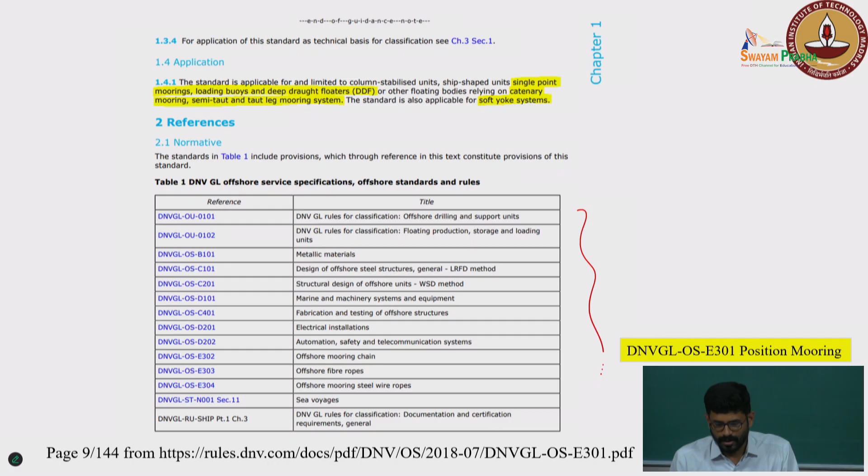This is about mooring design, but it doesn't end there. When you start a design, you have to analyze it, and you have to again make changes, so it's an iterative process. Different mooring analysis methods exist: quasi-static, frequency domain, time domain. This is what industry practices.

Again, in this time domain, we have the decoupled analysis and coupled analysis. But before we get into time domain, it is important to understand quasi-static analysis, because that is the very first step when you have a floating structure and you put your moorings in place.

Quasi-static, the word itself clearly says it is not disturbed much. Your floating structure moves very slowly such that the line dynamics are not affected. Basically this point moves along with your floating body, correct? If your floating structure is going to move, that point is also going to move along with it, so it will create some kind of whipping action.

In reality, it will create some kind of whipping action, but if your floating structure is not responding quickly to the environment and moves slowly, then a quasi-static analysis can be done. That will be the very first step, and then you can go on to do the time domain analysis.

So the industry practice is time domain analysis with the decoupled approach. The coupled analysis we generally don't do, because it has a very high computation cost. To solve a problem, it can take almost a week to complete.

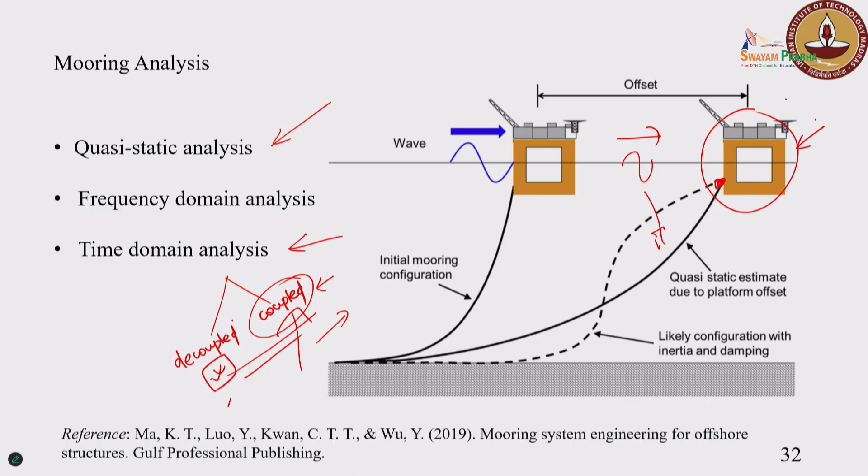So now for the basic data input, you need to know the type of floater you are going to deal with - in this case the WEC characteristics, type, and dimensions. The floater motions will give the loading to the fairlead of your mooring line - that is what travels to the line. So you need WEC characteristics and environmental loads: wind, wave, current, water depth, soil characteristics, and operational requirements.

Sometimes, as said, for your drilling operations you want to have very little excursion. You go exactly to the site where your floater is, and to that particular location. For example, if this is the site where you want to drill, you take your semi-submersible exactly to the top of that place where you want to create the well. Then you have a restriction on how much this floater can move around.

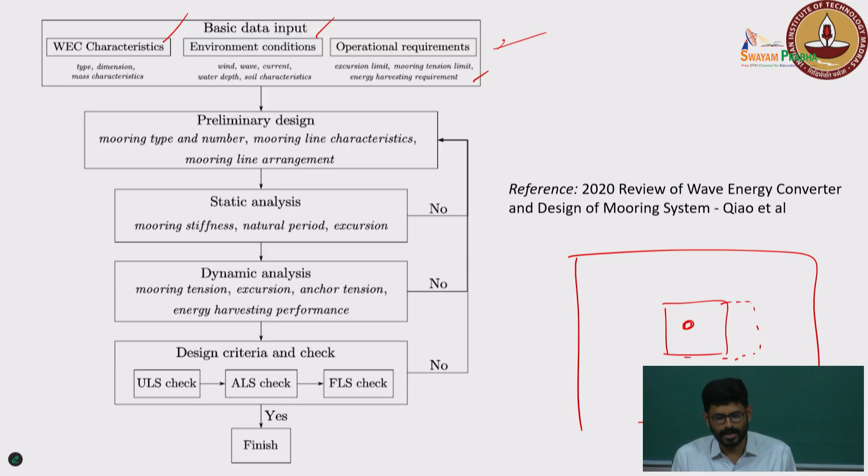So we have some constraints that have to be taken into consideration. This includes the excursion limit, and then the preliminary design, basically selecting the mooring type and number, and also the mooring line characteristics and the mooring line arrangement.

So how it has to be connected to your floating vessel and where it has to end. We start with the static analysis, then we go on to the dynamic analysis, then you do the design criteria. This is not a complete process, it is going to be an iterative activity. If it satisfies, go to the next step, or else you go on to change it. So that's what we mean.

The static analysis basically is to have a good understanding about what is the fairlead tension you get without any loads and other things. You just have a floating structure, you connect your lines to the structure, and see what is happening around.

Dynamic analysis, so basically when we say it, you are subjecting your floater to respond to the waves, and then because of the response of the floater, how that is being transferred to your mooring line.

Then we move on to check the design, because all items have a limitation. What is the breaking load limit? When you purchase some item from a shop, you actually know don't apply more than this load, it will fail. The same thing for your mooring lines as well, you will have some limit.

So by doing all this analysis, we are trying to check whether it is within the limit or not, whether my item will be sustaining, whether it will be safe for the 20 to 25 years service life. That is why we do this ultimate limit state, accidental limit state, fatigue limit state. Once it satisfies all these, it is finished.

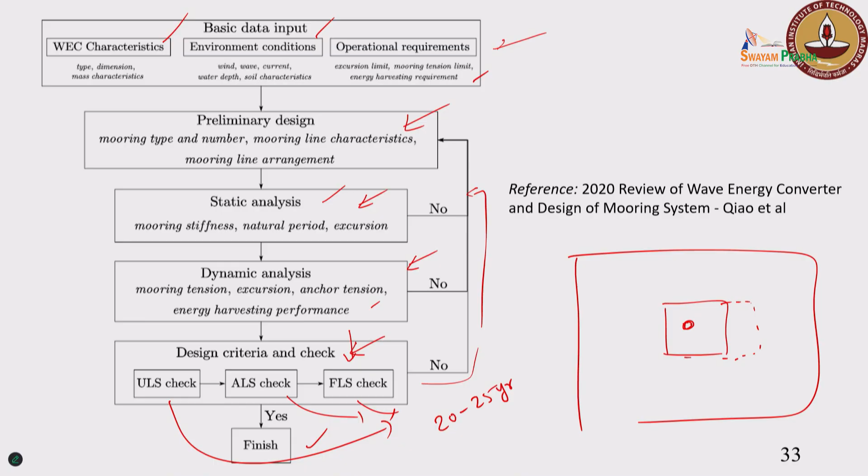Did they consider the temperature gradient from the water surface? No, they don't worry about that. They are all rugged structures. All this chain, wire rope, the temperature gradient will not have any impact on the overall performance of your mooring.

Generally, how much does it cost? I am not aware of the exact cost, but it's all huge in numbers, especially for offshore mooring lines, because it has to take care of the corrosive environment. So it is not just your normal steel, it is basically galvanized steel. So all these things add up, it's an add-on to your existing items, so it will be very costly. Yes, proceed, I could give you some numbers.

Some literature said that mooring can cost up to 40% of wave energy converters. In 2019, I visited Hawaii, there's a wave energy test site, where some mooring failed. They are in the process to repair and rebuild the mooring. The water depth there is not that deep, from 30 to 80 meters, I don't know which one failed. It took them $2 million US dollars to fix.

So give you a sense of how much it costs. Also, like if it is an FPSO, is the amount you are putting worth it, because the FPSO itself will be a huge number and the mooring lines will be less in comparison. So it depends, whether like for a point absorber, which is small, the mooring itself will cost more relatively.

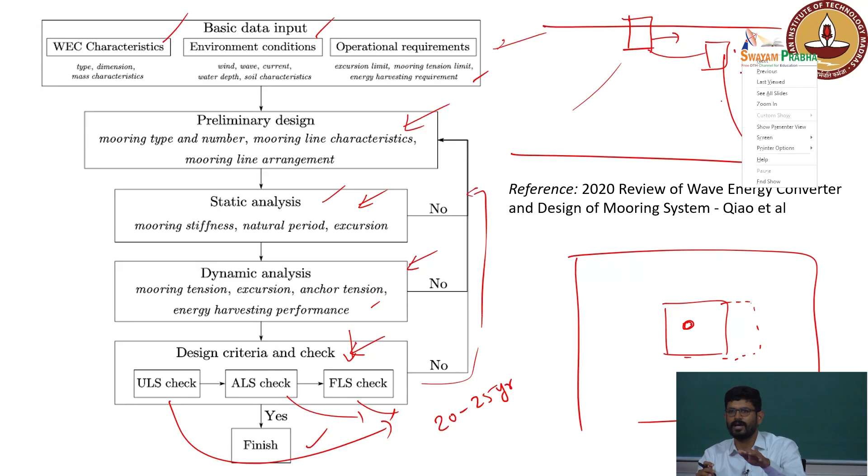What about that direction, sir? Direction-wise, that's a very generic question. For example, for a given site, the first thing you will get is a rose diagram. You might have seen a rose diagram - it shows in which direction, what is the most probable wave height, and what is the occurrence of that, all those things you will get from it.

Based on that, things will be aligned, so there is no direct straight answer - all these things are site-dependent activities. You need extra data, meteorological data, which also includes these items. Based on that, they orient the mooring in such a way that it takes these considerations into account.

What is the general span of mooring, how much lifetime? Whenever you have this, that is why we have the fatigue limit state. When we say fatigue, you carry out the fatigue analysis. Basically the fatigue limit state means you are going to do a fatigue analysis. One is you stretch it to the extent of what load it will take to failure - that is extreme analysis.

The other is fatigue analysis - you apply cyclic loading for 20 years, and sometimes this can be very cyclic in nature. For fatigue life of the subsea flexibles or similar components, the factor of safety has to be 10. Which means if your service life is 20 to 25 years, your fatigue life should turn out to be a minimum of 250 years. When you carry out the analysis, if your fatigue life is more than 250 years, that is a pass. If it is less than that, you need to go back and change it.

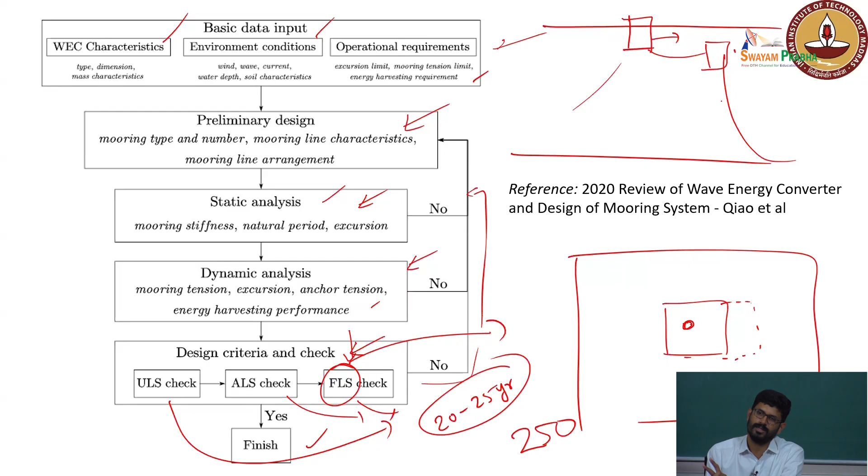Is there any specific diameter or something depending on the floater size, or how do you decide?

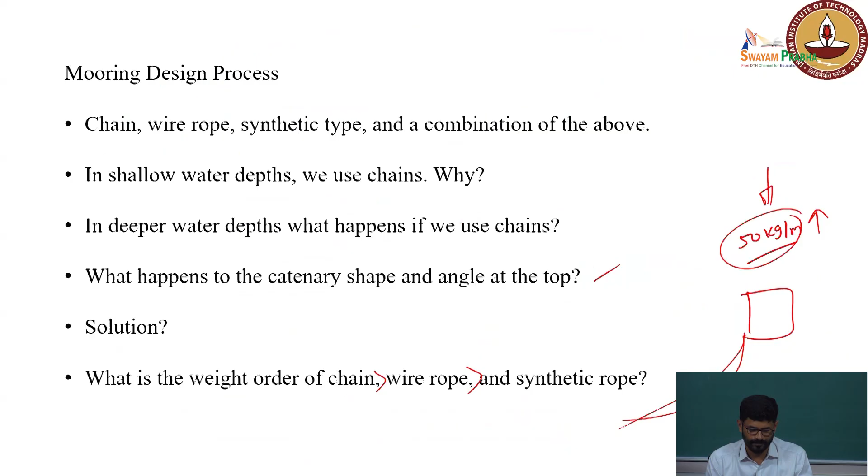It depends on the excursion only. Your watch circle basically says what excursion can happen. For example, in drilling, you don't want it to go beyond a particular distance because that will impact the drilling riser. So there's no straight answer, it depends on depth and floater size. The anchor circle varies: in shallow waters, the anchor radius to depth ratio is a higher number, whereas in deeper water it is equivalent to 1.

So this is for your anchor circle. For the watch circle, you can tune it. For example, if you increase the pretension value, the excursion also gets limited, correct? So all these items are a trade-off between each other.

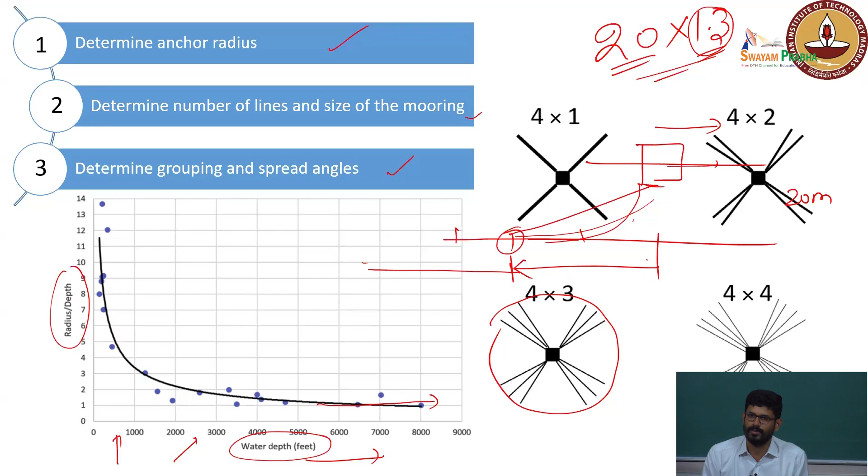If your pretension increases, the line length on the seabed will come down, correct? Which means at end B, the anchor point, there will be some loading now. If you have very few meters on the seabed, say 300 or 400 meters, that load will not be transferred to the anchor.

It is always safe, because when your floater moves, that much chain has to be lifted up, right? That chain will act downward, giving the restoring force for your floater. When your floater excurses, it has to lift the mooring line, so it's in suspension. The self-weight acts down and brings the floater back to its initial point.

Okay, so now we'll use the board to make it a little interactive, and we'll do the derivation.

If some inputs are given to you, how do you trace the catenary shape? What will be your top tension? As a thumb rule, we can say the water depth multiplied by some catenary factor, multiplied by its weight per meter, gives the top tension. Is that right? If this is your height, what did we say?

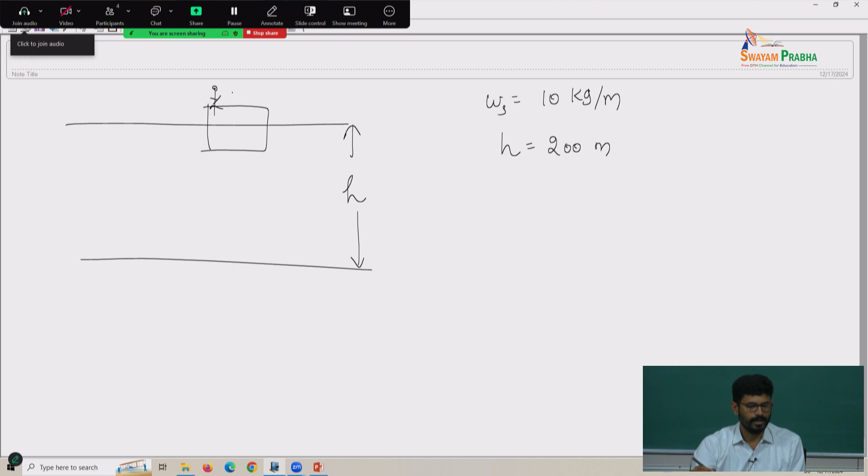Now let's take this water depth. You know at what site you are going to install it. Generally, when you go for a mooring installation, you know where you're going to install it and how much line you're going to release from your end. A person is standing here, and he is going to release the mooring line.

He knows how much line he's leaving. So now let's take the total length as 300 meters, and the water depth as 200 meters, sir. It has to be more than that, right?

So now you dropped your anchor somewhere here, then you have this connection all the way to the surface. The connection is on the sea surface itself. You know where exactly you dropped your anchor also—as the installer, you know you put the anchor here and moved this much distance. So this distance is also known; let's take this as x.

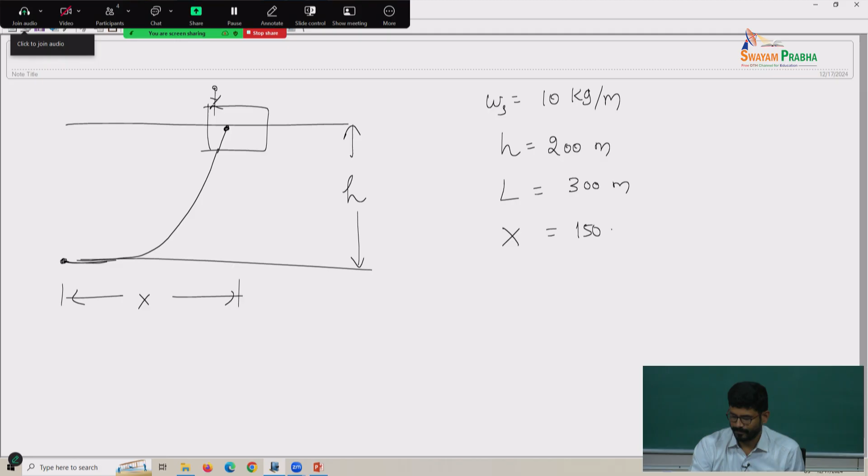Let's take x as around 150 meters or 100 meters. So let's increase it to 350 for safety.

So now you know you have certain inputs. The question is how to get the proper or exact top tension, if somebody wants to know what is the tension along the line, how to get it. On a simple thumb rule you can get it. Basically, 200 multiplied with some catenary factor into 10, kg per meter, and this is in meters. So you will get what is the tension at that particular point.

But if I want to trace this shape now, at some x comma y, let us take x1 y1, this is xn comma yn. If I want to trace this shape, how to get it?

You get the point. Some inputs are given to you, whether you will be able to trace the shape, that's a question. Now we need to have some equations, then only we will be able to get it. So now you have a physical problem with some inputs. Now I want to convert it to a mathematical sense, but I actually don't know how to get it. As of now, I don't know.

So now to get it, let us try to take a very small element and try to do the force balance. That's what you did in fluid mechanics all the time. Whenever you want something, you take a very small element and try to do all the force balances, try to come up with some expression.

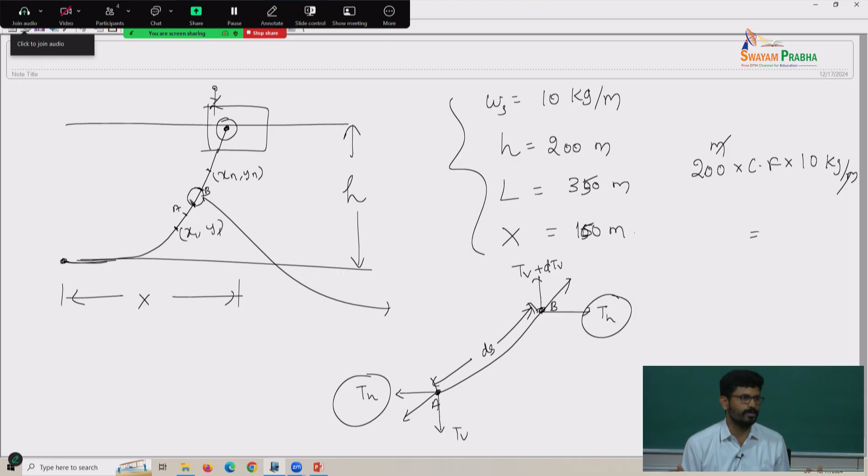When we say d, it is basically an incremental tension, incremental value. The d is basically a small element - for that small element, what is the incremental happening. So here the TH will be same as the TH. Why? The TH whatever you have here is equivalent to the TH here. Why? If there is a difference in the horizontal forces, horizontal tension, it will move away. So you are sitting in place, whatever the environmental load acting on the right side is equivalent to the left side, that is why you are staying in place.

The same way here also, so this TH will be same as this TH, whereas for TV it will be TV plus dTV, because if you are just lifting a line, for example you start lifting it, so here whatever you see at the bottom, at the top, it will be different. The same procedure.

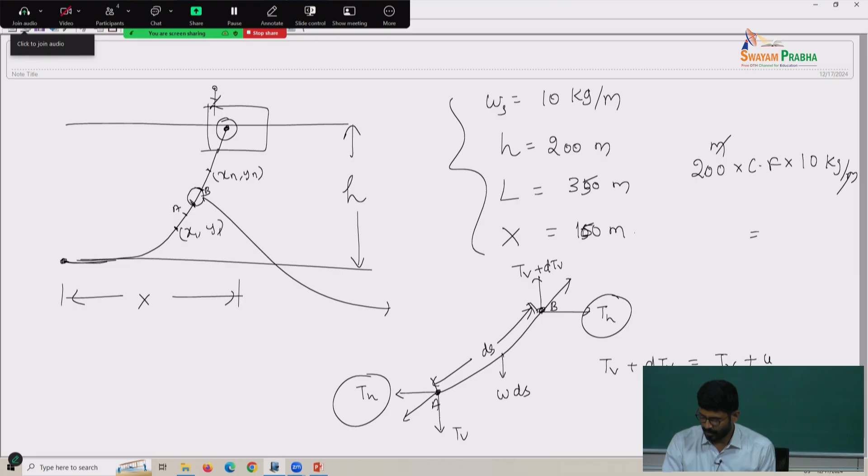Okay, so for this small element there will be a load acting downward, correct? We called it W. So this will be multiplied with ds, that will be the net load acting downward, so W into ds. Now let us do the force balance for this: Tv plus dTv equal to Tv plus W into ds, the net vertical activity. So this Tv will cancel out, and we get dTv equal to W into ds, is that right?

Okay, so now what else can we do? This is a very small element, so let us take this as dy, this as dx. So I can write ds as the square root of dx square plus dy square for a very small element. Is that correct?

Again I will summarize. You have a floating body, a mooring line is connected, one end connected to the vessel, the other end connected to the seabed, with a few meters lying on the seabed. This particular point is the touchdown point. I think we forgot to write it, so let us write touchdown point. If you lift it, this point is the touchdown point, and after that a few meters lie on the seabed. This is your fairlead, and this is your anchor point.

So now in order to solve this problem, since you have been given some inputs, we are trying to trace the catenary shape. To do that we need some equations. In order to get that we took a very small element and tried to do the force balance. That is what we have been attempting all this time.

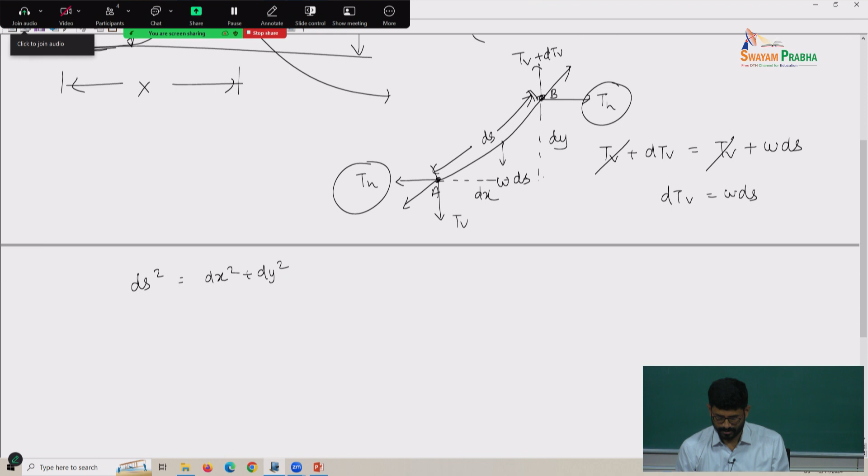So now can I write it this way? Because I need some expression, then only I can solve it. I need y as a function of x, which as of now I don't know. I am trying to do the force balance for a small element, to see if any rearrangement can be done, that is what we are attempting. So dy by dx whole square, I can write it like this - we did nothing, just divided by dx square throughout, correct?

Okay, so at this particular point you have some theta, correct? This theta is equivalent to this theta also. So now we can write tan theta equal to dy by dx, which is also equivalent to Tv by Th. Tan theta equal to dy by dx, tan theta equal to Tv by Th. So now this dy by dx you can write as y dash, so it equals Tv by Th.

Okay, so now we have another item here: dTv equal to W into ds. We need to bring in these different items which are segregated, and try to combine them to get some expression. That is the idea. The whole idea is that you will have some equation y as a function of x which you don't know, and you are trying to find it out based on a simple force balance for a small element.

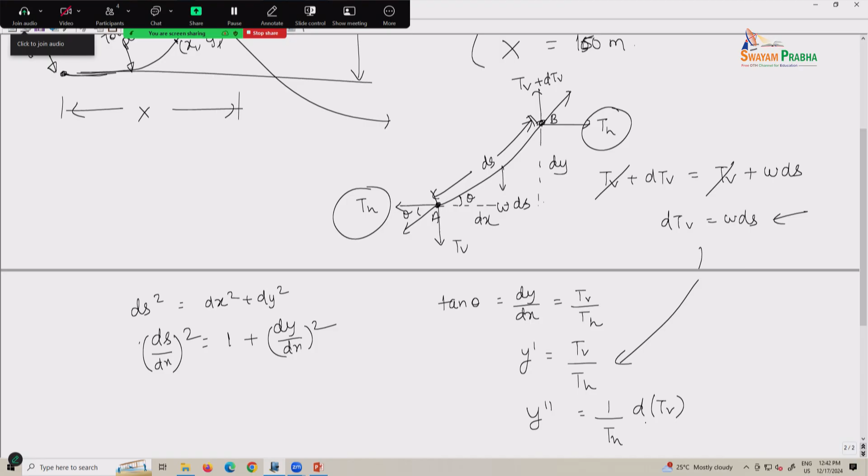So now this dTv is equivalent to W into ds, correct? This dTv I am bringing it from here, divided by Th into dx. We did nothing, we just took a very small element, tried to do the force balance, tried to establish some relations, and tried to mix them up to get some expression. That is what we are attempting as of now, right?

Okay, sorry, I think it's moved away. Okay fine, okay so then.

Let us write it again, w by Th into ds by dx equal to y double dash. Now let us give some name for this Th, because w is known to you, but Th is unknown. As of now you don't know Th, right? The horizontal force, you don't know what is actually happening. So Th is an unknown, whereas w is known to you, it is a known quantity.

So now let A equal to Th by w. Some new understanding we are bringing in, a new term, A equal to Th by w. So now this basically becomes y double dash equal to 1 by A ds by dx, right? The same thing, no change. So Th by w I have written as A and simply retained it.

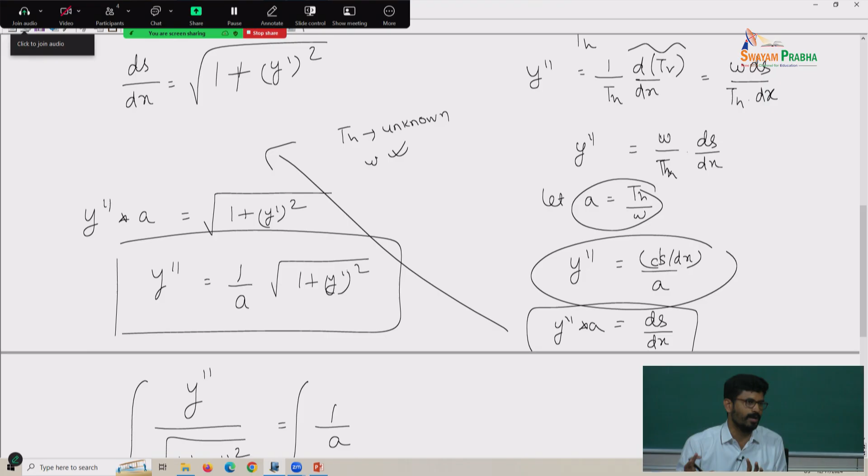So now let us get back to the boundary condition. So at this point, for ease, let us try to have the origin here at this location.

Let us have our origin here. At this particular point, the touchdown point, x equal to 0, correct? Let us take small x for this. This is capital X. From here to the point, it is the small x.

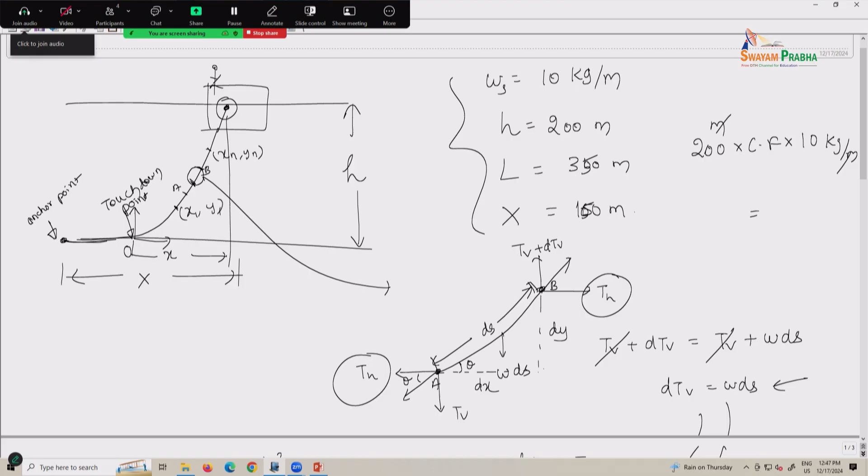At x equal to 0, y is also 0, correct? See, you don't necessarily need to have the coordinate system there. It's always a question - you are free to move around, but accordingly you should take your boundary condition values also. This is easy for me because at the touchdown point, my x is 0, y is 0, y dash is 0, s is 0, everything is 0. So now, considering that at x equal to 0, y is 0, is that right, sir?

So now let us write the expression y equal to sine hyperbolic of x by a plus c1, correct? Just the same thing written this way, that's all. Wait, is this y dash or y? Y dash, okay, this is y dash. So when x equal to 0, y is also 0, which will give us c1 equal to 0. So this will give me y dash equal to sine hyperbolic x by a. Is that correct, sir?

But then I am not interested in y dash, I am interested in the expression for y - for each value of x, what will be the value of y. So now what do we have to do again? Integrate, right? If you integrate, you will end up getting y on the left side, and on the right side, sine hyperbolic integration gives cos hyperbolic x by a, divided by 1 by a, plus some constant, let us call it c2. So now this is the expression I am actually looking for - for some value of x, whether we are getting something or not.

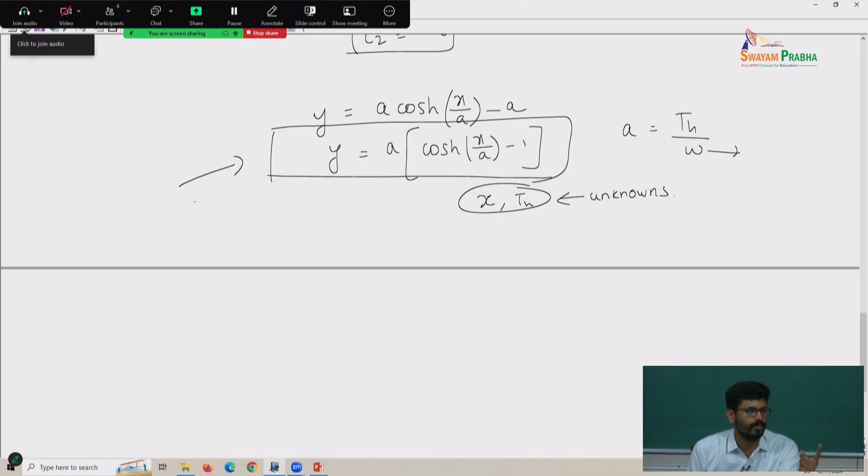Okay, so now you have this expression. Now we need one more expression, right? Because there are two unknowns here. See, if you have two equations, two unknowns, good to go - you can solve the problem nicely. But then you have a single expression with two unknowns here. x is unknown, th is also unknown - both are unknowns. So you need one more equation. As of now, you got only one equation. You need an additional equation to solve the problem, sir. You cannot solve it as such.

Correct? See, the problem was very simple - you know how much line, what is the weight, everything. But then you are unable to say exactly how much length will be on the seabed, what will be the shape of it. A simple problem turned out to be very complex as you started moving it. But then we started discussing for a discrete element, and we ended up having some expression, but still it is not complete. As of now, the problem is not complete. You need to have an additional equation. That's what we are saying. So now let us see whether we are able to get some expression for S.

For S - so what is the expression for y dash we had?

For y dash, where is there? Y dash equal to sine hyperbolic, right? Okay.

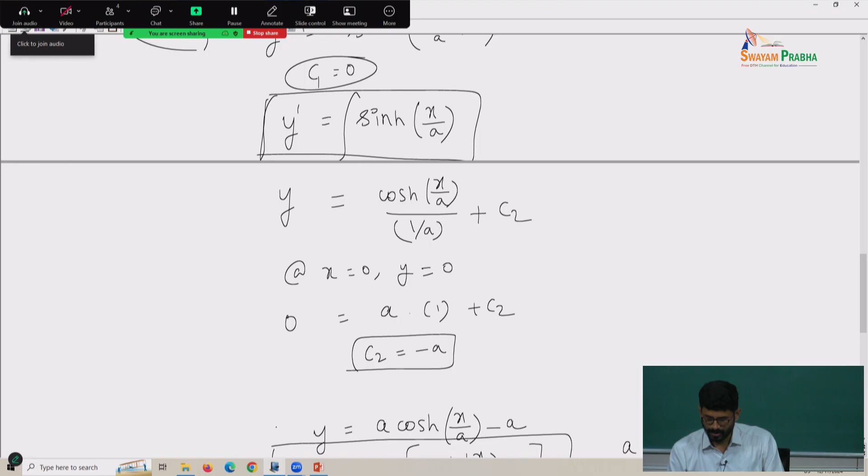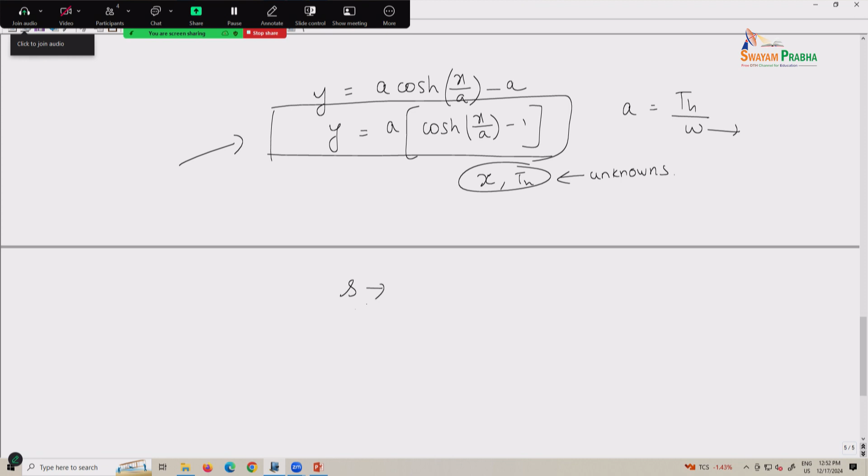So y dash, okay, so we have, I think we will write it bottom only. So now we are looking for some expression for S basically, right? Because that is the length which is suspended, right?

So again, to draw the figure, you have a floating structure, now let us take, you are making some connection. So this length, I think I made, let us take it. So from this point to this point is basically your S, the suspended length, right? What are the length on the seabed?

Let us name it as S naught. Let us name it, right? So your total length is basically S naught plus S. Is that right? I can write like that, right?

From this point to where the fairlead connection, that's what we call it as capital X, correct? So now, in order to solve this problem, you should know what is the value of TH, then only you can actually solve, right? But you know what is the value of L, because that is given. You know how much you have left it, right, in the sea. You actually know how much length is dropped in the sea, that length you know, because some inputs are there for you.

So now we need to have some expression for S, right? So from which expression can we get that? From which expression can we get it? Expression for S.

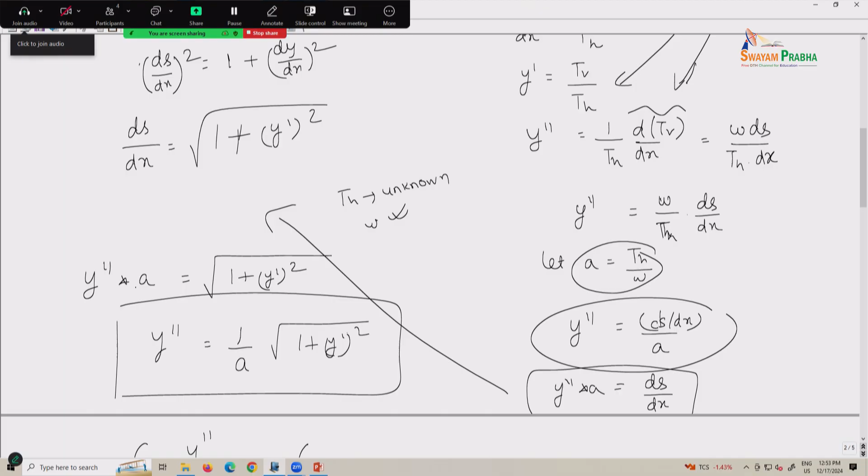See y dash, you can take this expression, since you know the value of y, you can plug in this value, that is one way to do, right? Is there any other easy way to solve the problem? Can we get something else easy?

What else we can do, sir? You get the point, right? We have two unknowns, we got only one expression, we need an additional expression to solve the problem. That's the point. How to get the additional expression?

Moment equation. Why? No, we did not, we have just taken what is the forces acting at either end of the discrete element only. We did not go for any of that, that's what we told, right? It is not having any bending stiffness at all, so it is just collapsing. So there is no stiffness offered, so that and all is not coming into the picture.

Correct. So now we are looking for some expression for S. How to get it? So if you actually take this expression wherein you have y double dash into a equal to ds by dx, if you integrate it, you will be getting some expression for S as well.

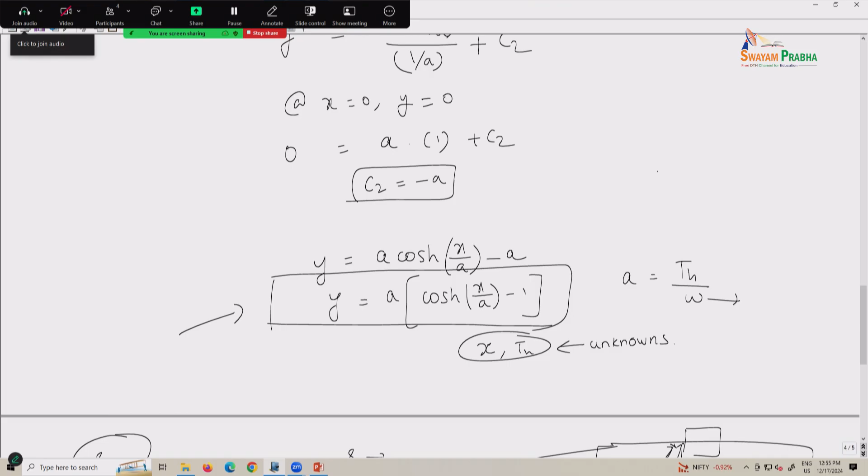Is that right? So now if you plug the value of y, this expression of y in that above equation, you will get the expression of s. So s basically ends up with, how to get it easily,

y double dash into a equal to ds by dx, right? Okay, so I think I can plug in this y dash value also here, is that correct? So root of 1 plus y dash, what is the expression you got? Sin

hyperbolic x by a, right? So I can write sin hyperbolic x by a square, ds by dx. If I integrate this one, I will be getting the expression for s, is that correct?

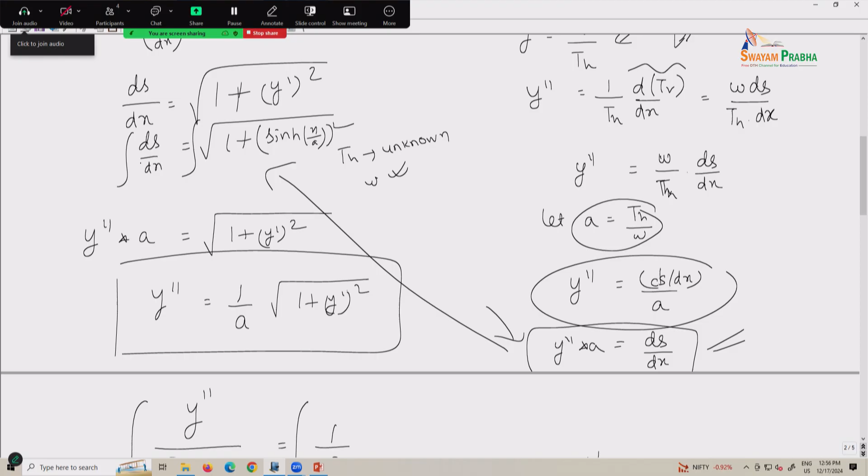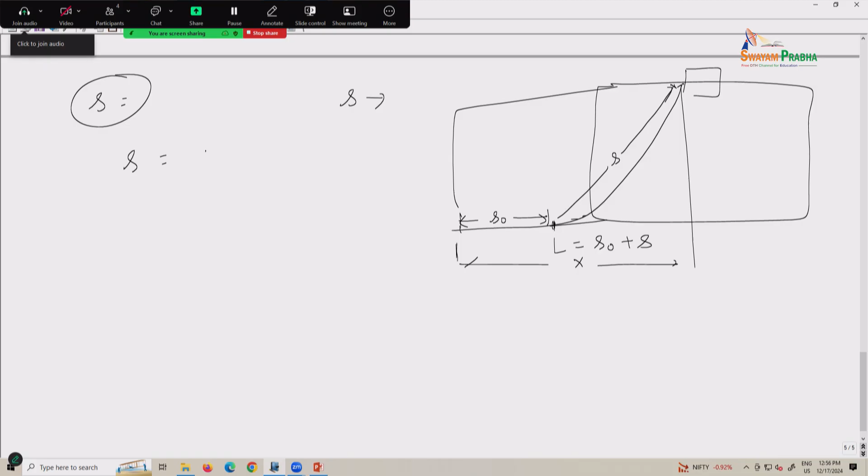So there are multiple ways in which you can get this, either you can do the double integration for y and use this expression, or use the other equation to get the expression for s, right. So finally you will have something of this form. What is the expression you will get? I think it is a sin hyperbolic x by a, something you will get. Please check whether you are getting this one. Please check.

You need an additional expression to solve the problem, that's what we're discussing. So finally you end up getting an equation for s as well. Now you have one equation and an additional equation, and these two have to be solved together. So a system of nonlinear algebraic equations has turned up. You started with nothing, but finally ended up with a nonlinear algebraic equation. The problem is you cannot solve it straightforward, you need to adopt some Newton-Raphson method. An easy problem looks easy, but it's actually not easy when it comes to really solving a simple catenary for a single line.

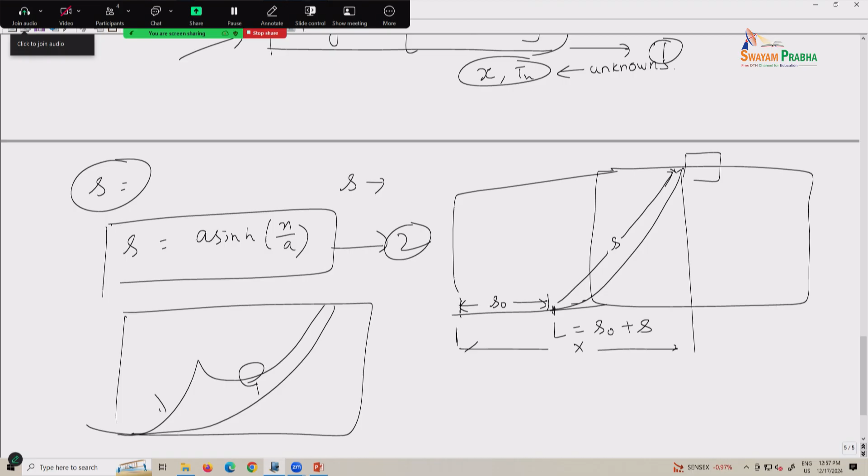But now if you have a mooring with some kind of buoy attached, say I attach a buoy to a catenary line, the shape will change to something like this, and it becomes even more complex to solve. So you'll have one catenary, a second catenary, a third catenary - three catenaries. You'll have a lot of unknowns now, and accordingly you have to set up the equations to solve the problem. So I just want you to feel that it's not as easy as it looks.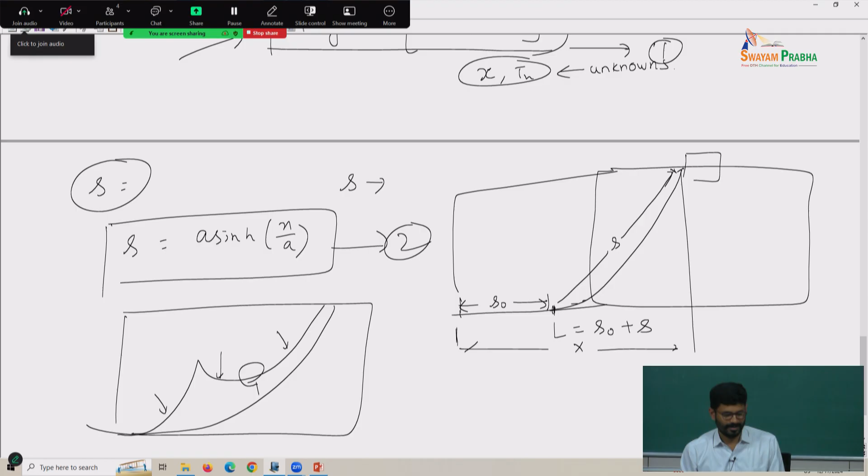When you use a tool, it's always nice to run through, but when you actually solve it... okay, now let us get back here.

Okay, so a simple MATLAB program is written for this. Actually I don't want to get into this Newton-Raphson again, it will take another 45 minutes at least to run. If you are happy to sit, I am happy to go, but you will drain away. If anybody is interested, we can sit and continue.

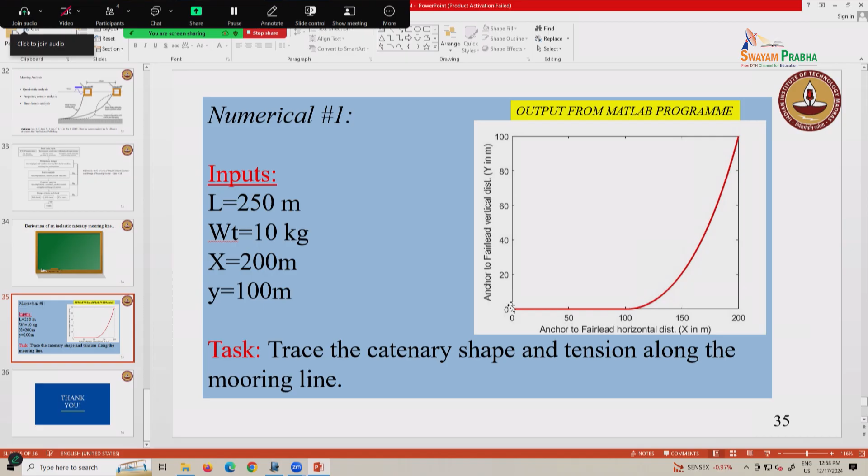When I wrote a MATLAB code to check it out, it ended up getting this outcome. Similarly for your moorings, again a mooring line with the buoy - so now this is with the buoy. In order to reduce the top tension, a buoy is added, and this is all without any environmental loads. You see the complexity - without any external environmental load, the problem is not that simple.

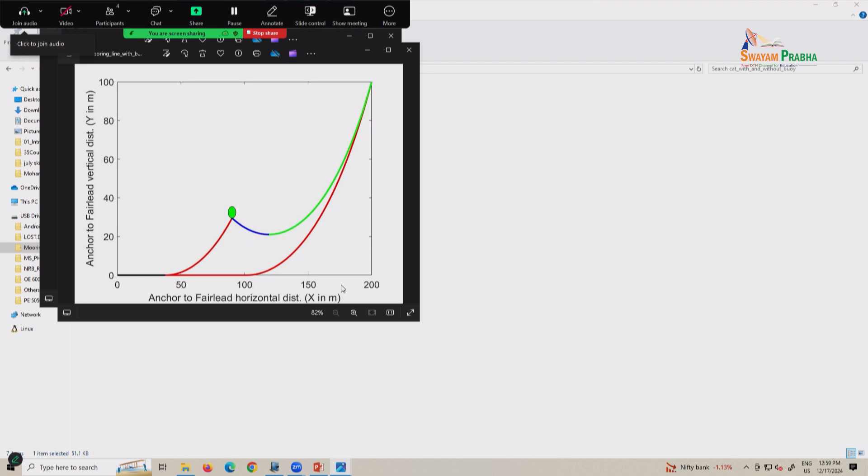But when you actually take the environmental loads into account, how do you solve it? That's a question now, and that will again be a big module. If you're able to solve that, then you've actually developed a tool, correct? If you're able to get, as a function of time, the response of each of the different discrete elements - the stations - then you've actually solved the problem. So the complexity keeps mounting as you go from the simple case to a complex one where you want to incorporate the effect of environmental loads as a function of time.

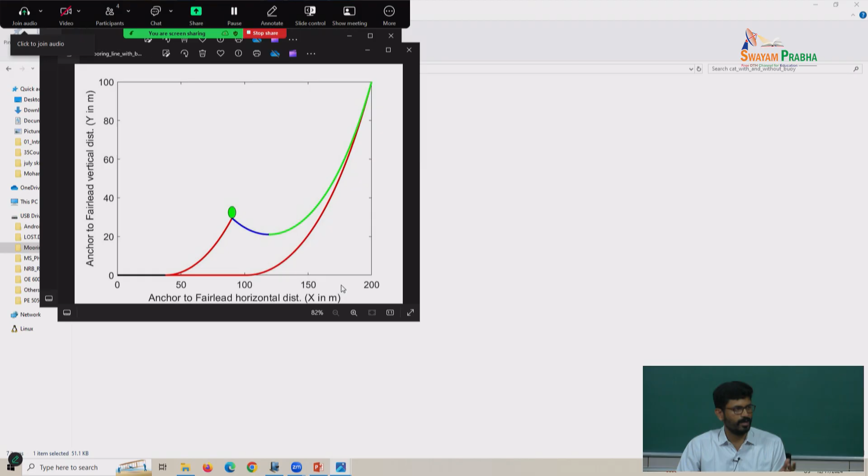This is very nice work that you can actually do for your PhDs also - if you're able to develop your own tool, that is much preferred. People who write their own codes, it always goes a long way, so I strongly encourage it. I'll stop here for this. If anybody is interested, maybe we can extend this and keep on going, it will go for hours. It would be nice also, but then you should also get involved in that - then it becomes good.

Okay, I'll stop here. If any other questions, we can take those up. If you are able to do the time domain analysis for this - as of now, we did not account for the fairlead position moving. If that fairlead position is going to move, if I give some harmonic motion for that, then the response as a function of time of each of what we call the stations - those things will also keep moving.

That's a very nice analysis. I also want to point out there are some software that you can use. For example, Orcaflex - they developed software that can do static and dynamic analysis. And recently, they also extended the work together with us to include vortex-induced vibration.

There are some commercial software that probably work better too. This software is very popular for the oil industry for mooring analysis. The software is pretty expensive, but they may give students some special license arrangement. So that's what I wanted to point out - you can use some tools for that. These days we have a lot of sophisticated tools - you just think it will appear in front of you, but it can also create a lot of dummies basically.